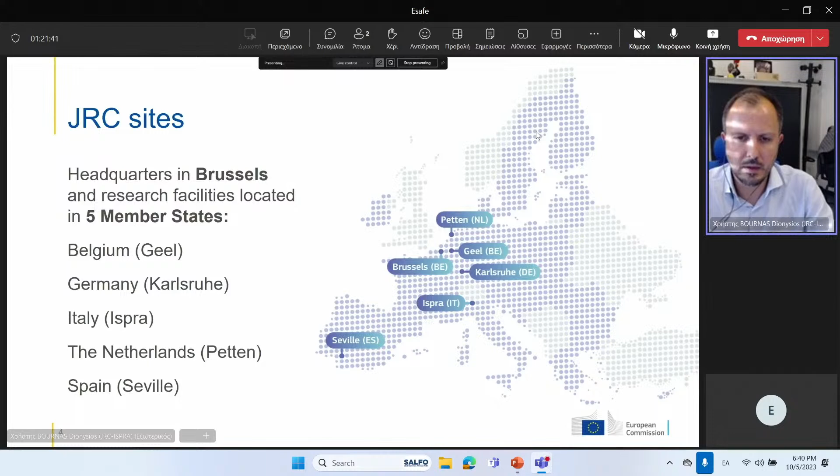First of all, to put you in context, the JRC is the Science for Policy Service of the Commission, and we provide independent evidence-based knowledge for EU policies. We have our headquarters in Brussels, but we are divided into 5 sites, with the biggest being in Ispra, where I'm also based.

Regarding this talk, it includes 4 areas about buildings and EU policies. I will start with those, then experimental assessment activities for existing buildings, then novel technologies for integrated retrofitting, and I will close with the evaluation of the integrated retrofitting.

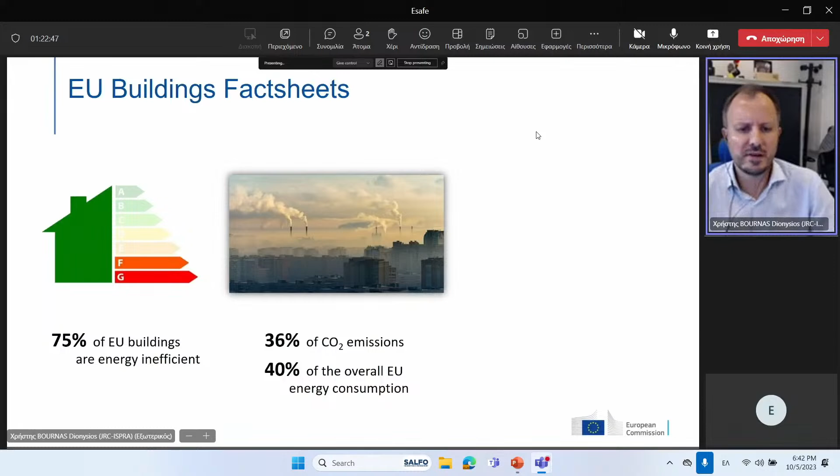The main issue in Europe is that our buildings are old. They are quite energy inefficient - 75% of our buildings are energy inefficient, consuming the big majority of total EU energy, 40%, and generating 36% of CO2 emissions. On top of that, 1/3 of Europeans are exposed to earthquakes. So when we speak about renovations, we should take into consideration seismic together with energy.

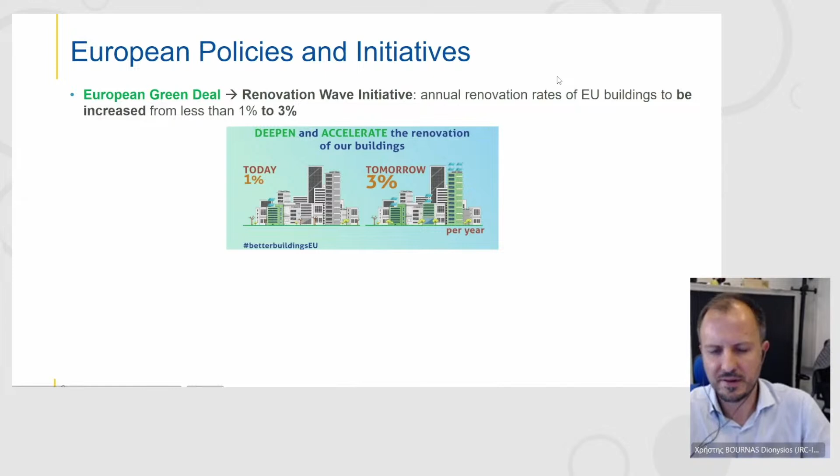Now in terms of EU policies and initiatives, we have the Renovation Wave initiative. Today we renovate around 1% of our buildings - that was the figure in 2020, but we need to do more, to reach 3% if possible. That was even highlighted last year with the energy crisis and the need to reduce dependence on Russian gas.

So energy renovation is a key element. However, the Energy Performance of Buildings Directive itself states that countries need to use their long-term renovation strategies to address also seismic risks and fire safety. On top of that, the recovery and resilience plans following the pandemic found many countries proposing integrated renovation schemes.

So in this presentation, I will start with the experimental assessment of existing buildings. We did that by designing and constructing a full-scale prototype building, typical of pre-70s construction - this is a masonry infill RC frame - and that was done at the European Laboratory for Structural Assessment, the ELSA lab in Ispra.

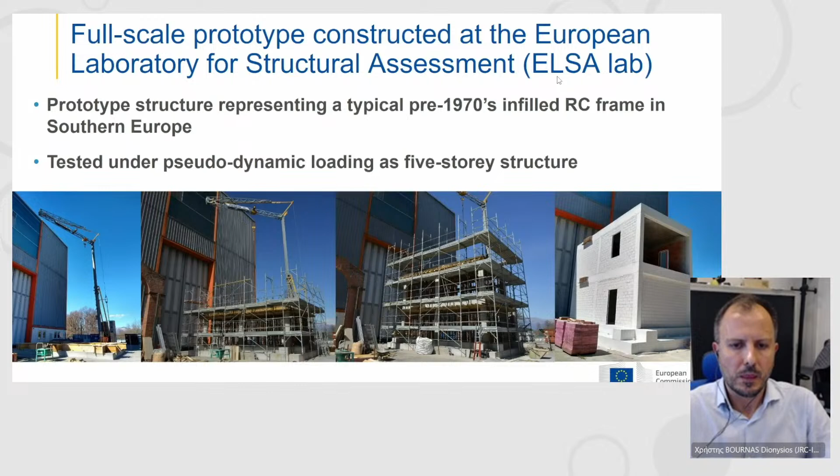Here you can see a video where this building was transported into our laboratory. I don't know, do you see the video already?

No, we can see. Oh yes, it's moving, so it's a video. There is a delay.

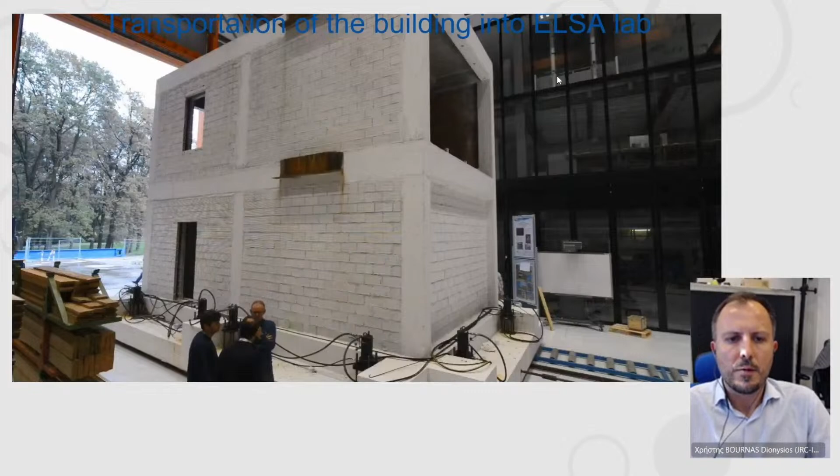This is to give you an idea of the scale. This is the full-scale prototype, and we did seismic assessment tests, but also tests to evaluate the energy efficiency of this building.

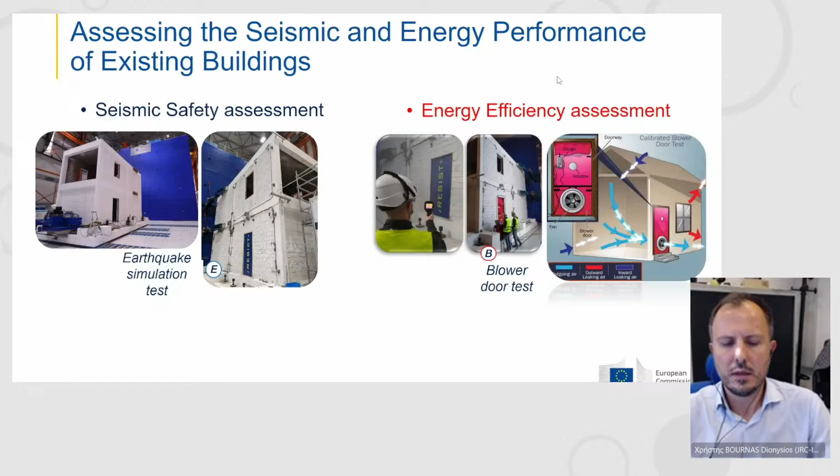In a series of tests, we initially evaluated the energy efficiency by means of blower door tests, and then we conducted earthquakes. We saw that even a slight damage, as you can see here, could reduce the energy efficiency significantly—even damage we wouldn't consider for strengthening, because it's only minor.

And then we continued until bigger earthquakes. I will go directly to the next slide, which shows the last test at a peak ground acceleration of 0.30 G. This corresponds to a design level earthquake, both in Italy and Greece, I would say.

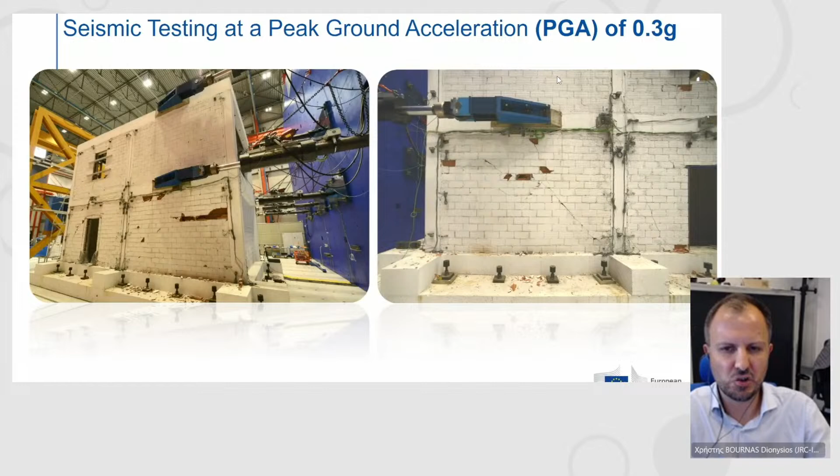In these two videos, you can see that the masonry infill is completely destroyed. Those damages that were noticed are not repairable.

So the outcome is that under such earthquake, we have damage that is not easy to fix because of the high costs. But even in small earthquakes, we saw that the thermal performance of the building is reduced.

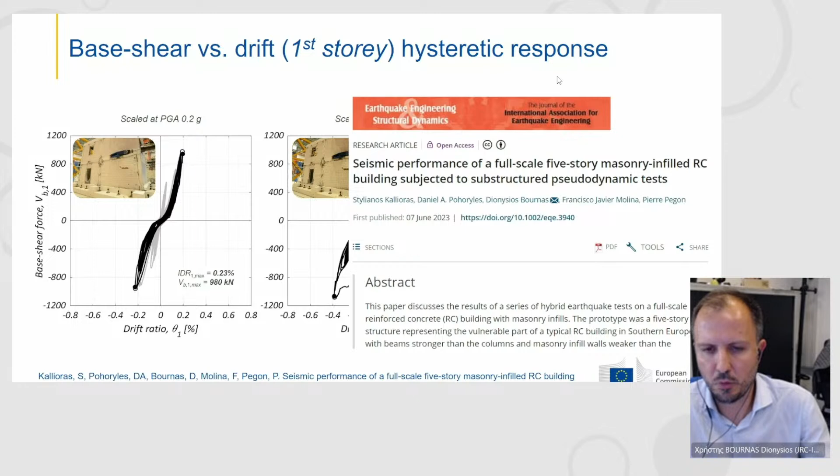You can find more details about this study in this recent publication, which is open access, and we could provide it to you. The next step now, since we saw the vulnerability, is to apply novel technologies for integrated retrofitting.

In this slide there is a categorization of integrated renovation technologies. I would say someone could do integrated exoskeleton solutions, but this is a quite expensive solution. Interventions on the envelope of the building appear to be cost effective, or interventions on horizontal elements.

We focus our work on these types of interventions. Following an analysis we did, we saw that both in terms of costs and effectiveness, these two methods could be very effective. This state-of-the-art review provides more information on the analysis of technologies someone can use for integrated retrofitting.

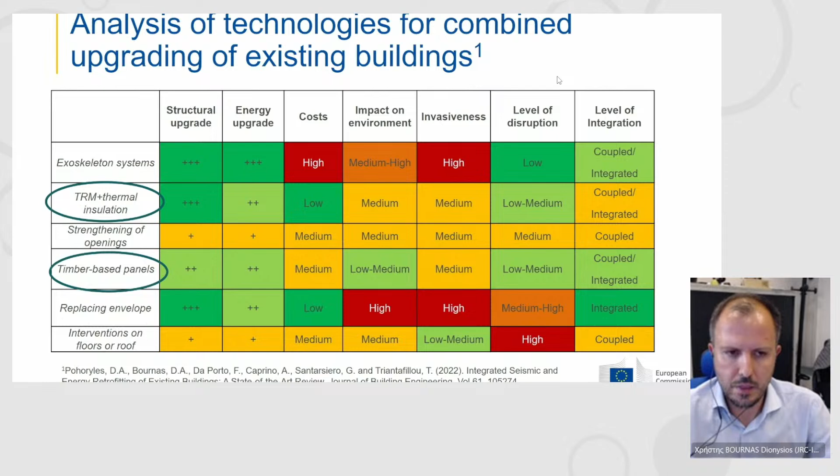The first step was to use timber, bio-based materials. This is a project NOTICE EUB. This is a Marie Curie fellowship we hosted at the JRC.

Now we went to the previous building. We demolished the damaged infills. Are you on the same slide with me? Yes. Okay.

So we replaced the damaged infills and we installed cross-laminated timber panels with two different configurations. In the first floor, we installed timber beams which were fixed to the beams, and then on the beams we fixed the CLT panels. At the end, thermal insulation inside.

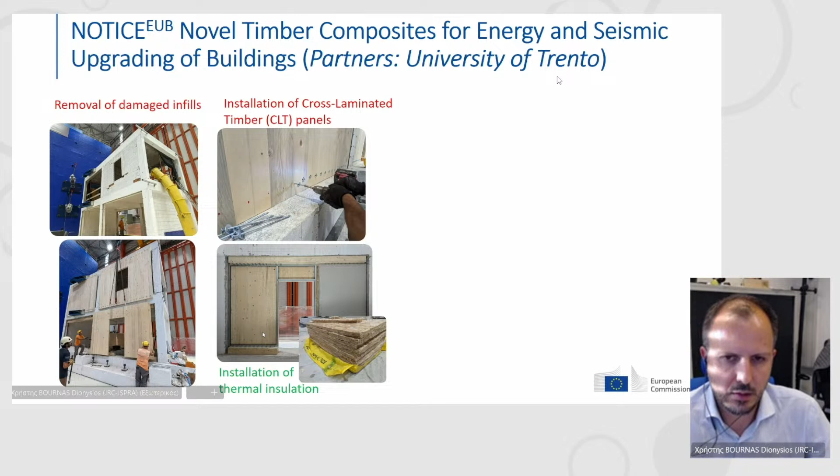In the second floor, the CLT panels were installed directly to the concrete beams, as you can see here. This would allow the strengthening scheme to be installed without removing the infills in case of existing structures.

The next video takes some time. Here we have the video where the same specimen was tested in a much larger earthquake, 0.45 G. I hope now you can see this video.

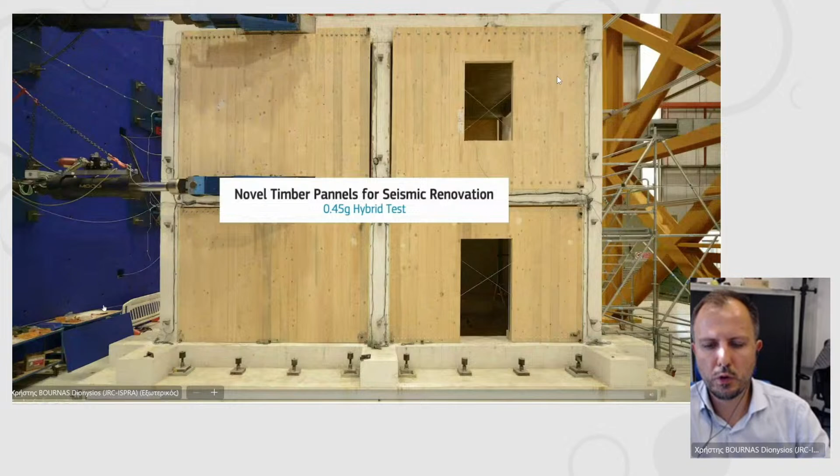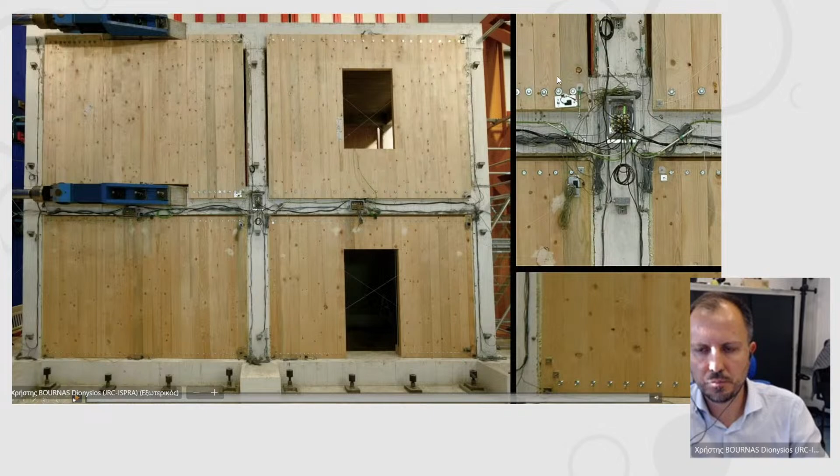Then there is another video in which you can see the connections at the beam column joint and the rocking of the panels. Overall, this technology proved to be very effective and damage-free up to a very large earthquake.

Another system we also tested was the use of advanced materials with thermal insulation, also tested by other researchers for masonry structures. We tested this here for reinforced concrete buildings with masonry infills. The idea is to first provide seismic retrofitting by strengthening the masonry and then add thermal insulation.

I will go a bit faster to the slide which shows the retrofitting. So in the same building we rebuilt the infills. We retrofitted the joints that were cracked because of the previous test, and after that we applied this material.

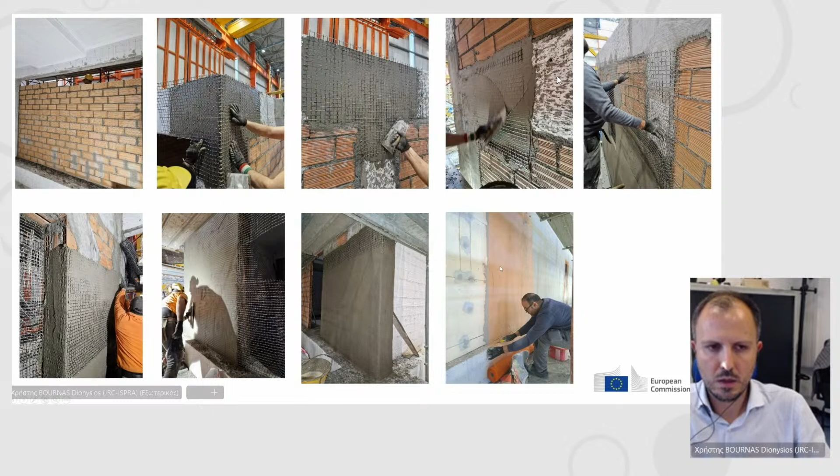This material is called textile reinforced mortar. So we have basalt fibers, jacketing with mortar around the infills, as you can see. At the end, on top of that, we have external thermal insulation. This is the building at the end of the application.

This is the last video of this campaign where we tested two large earthquakes until damage of the building. It survived very large earthquakes without damage, and then we went ahead with cyclic tests until we had failure of the system.

Did this video finish? Okay.

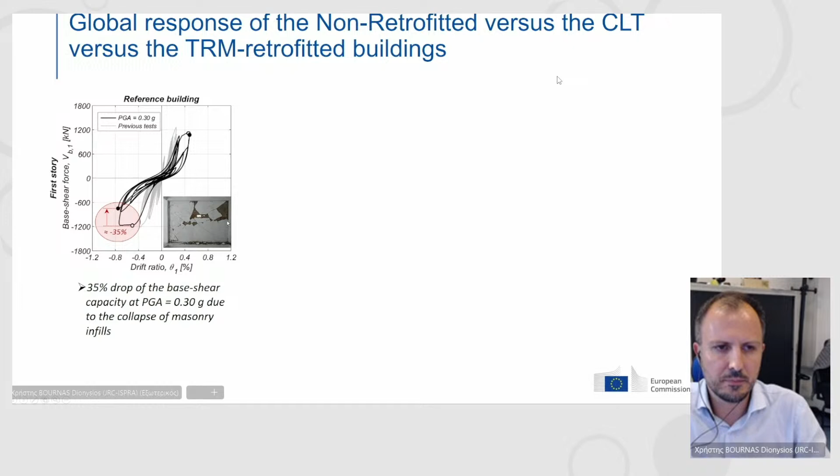Overall, we saw that a non-retrofitted full-scale building at the design level earthquake of 0.30 G leads to big damage and collapse of the infills. The CLT retrofitted survived an earthquake 50% higher without significant damage. The TRM retrofitted with thermal insulation was also quite elastic until PGA 0.35 G, but then had a drop of 15% at the maximum earthquake.

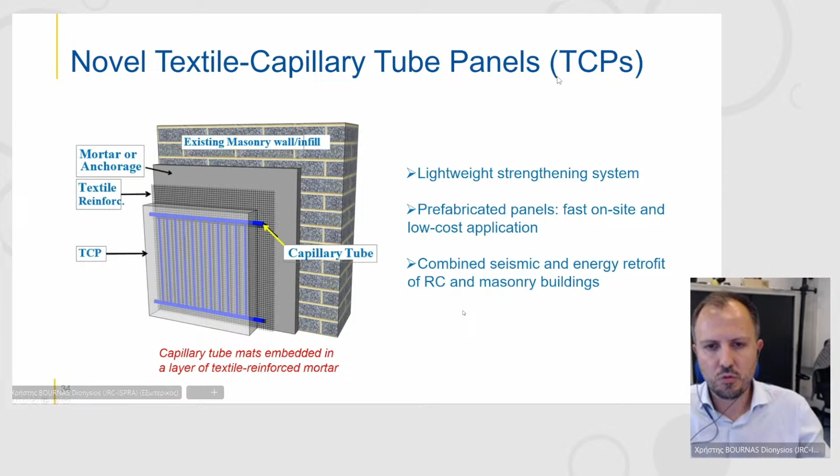You can better see this concept here. This is a lightweight prefabricated concrete panel that can be applied very quickly and very economically on site. In our case, we developed and constructed it in small scale in a lab.

So here we have the reinforcement with the capillary tubes, the mortar, and this is the finishing to connect and ensure the circulation of the fluid.

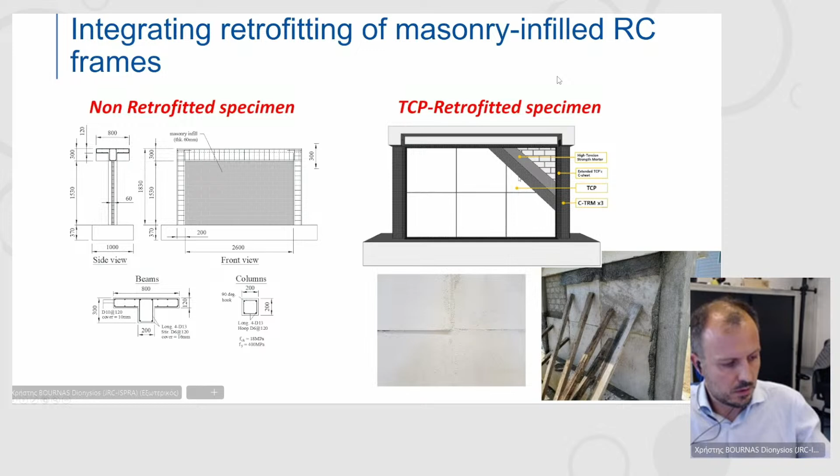This is like floor heating, but applied now to the envelopes, and we tested this system for retrofitting a full-scale frame with infills. We show that it's very effective in increasing the strength, but also it can stay in place at very large drifts without significant damage or high degradation of strength.

At the end, we also did thermal performance evaluation, specifically in a case study of a residential building in Korea, in Busan. Those panels were installed inside or outside the building, and the objective was to keep the temperature of this building at 20 degrees.

That was achieved in the wintertime, and we also studied two different temperatures of the fluid, 25 or 50 degrees, and we saw that even 25 degrees were enough for this system. On top of that, 25 degrees can be achieved using photovoltaic panels, as opposed to 50 degrees Celsius where activation of a boiler was necessary.

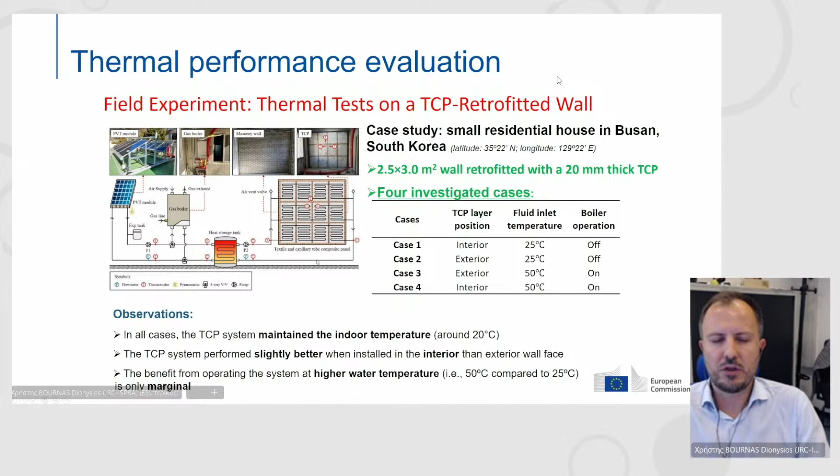So overall, this system was proved to be very effective both for seismic and energy features, and more details can be found in this publication.

Let me go also to two tests we did in collaboration with our Korean colleagues at Pusan National University. Here, that is a scaled building in comparison with the one we did at the JRC. It also has fewer openings, but we show here that this is the unretrofitted building.

We have in-plane damage, and after that, out-of-plane collapse, because this is a real earthquake with two directions of loading. We had collapse of the infills on the second floor.

Whereas the TCP retrofitted specimen survived a very large earthquake which corresponds to 200% of the design basis earthquake. Here we exceeded the capacity of the shaking table, so we stopped, and had only some damages, as you can see here, which were repairable.

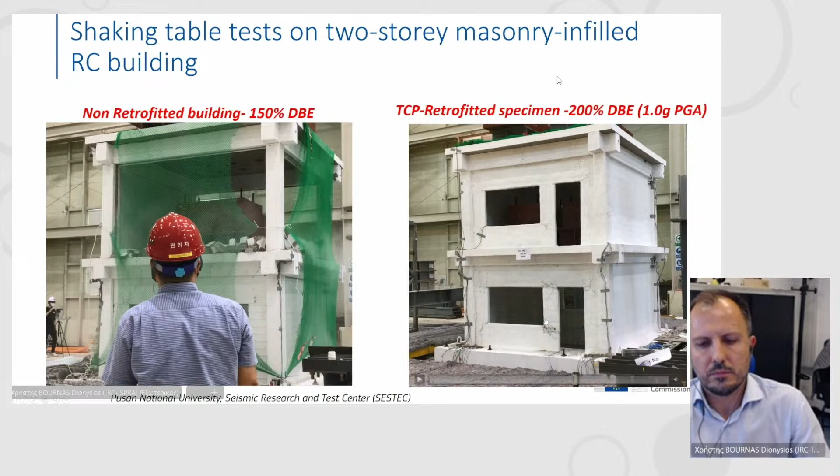So these systems were very effective, and we conducted this very quickly. I will go now to the impact evaluation of these systems.

We considered the European building stock in terms of building age, material, and height. We considered different locations, and conducted building energy modeling, around 1,000 analyses on different building typologies, plus seismic fragility analysis, and all of these were translated into costs at the end.

What is the expected annual loss for non-retrofitted and retrofitted buildings, and what could be the benefits of retrofitting? So we could assess whether the investment is cost effective.

For doing this analysis, we selected 20 European cities with different climatic conditions and seismic hazard levels. As you can see in this map, I'm not going to go into detail, but just to note that we have diversity of those conditions.

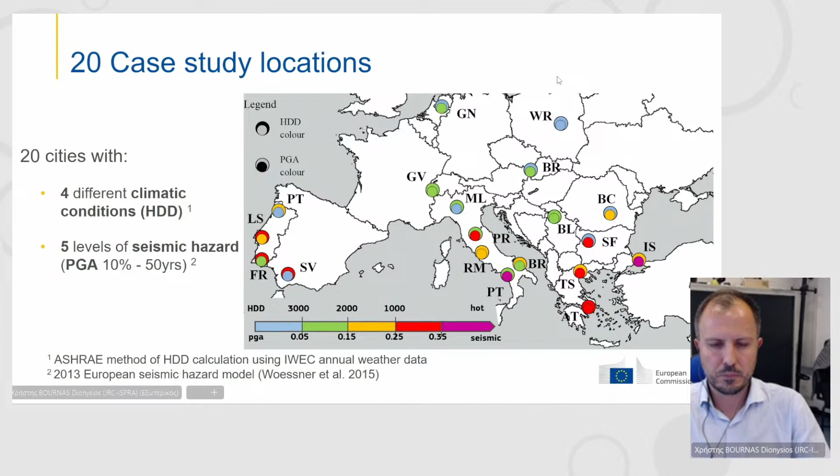What is important to know is that both seismic and energy standards were absent before the 60s. So before the 60s, in most European countries, there is no seismic design, and the thermal resistance is very low. So we prioritized our renovation scenarios for those buildings, and of course for those from the 60s to the 70s.

Two messages from this work: if we increase renovation rates from 1% to 3%, we can have up to 32% reduction in energy use and 38% less CO2 emissions by 2030 already. Note that these numbers relate to the energy and emissions from buildings only. But most importantly, for seismic regions, we can significantly reduce the payback period of the retrofitting investment, especially for high seismicity areas.

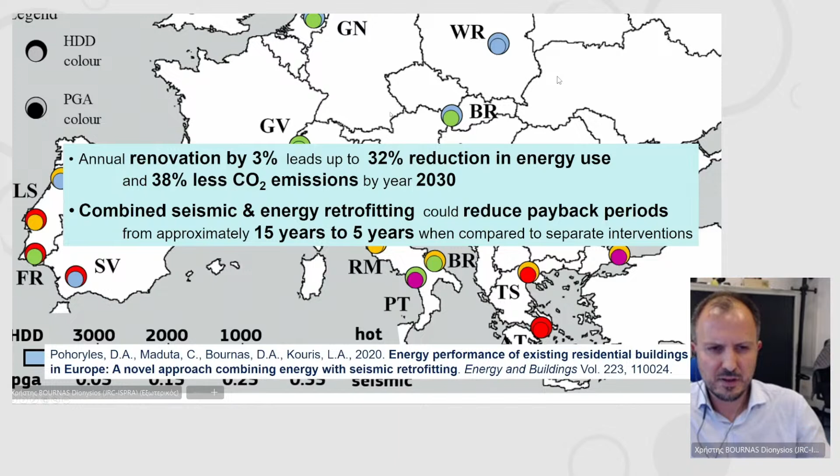More information can be found in this paper. So to close, seismic and energy retrofitting is required in seismic areas of the world, and this affects a large part of our building stock.

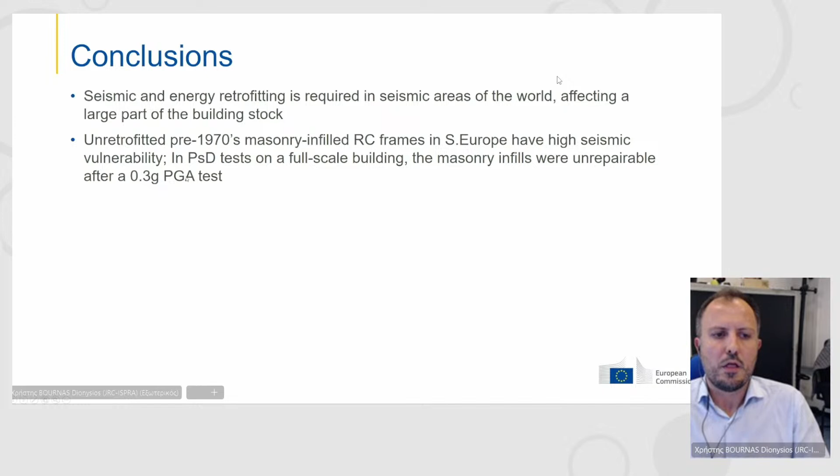Specifically for pre-70s masonry infill concrete structures, there is a problem with the infills, and this was proved to be catastrophic — the damage was unrepairable at 0.30 G. The novel cross-laminated timber panels investigated were found to be very effective until we stopped testing at 0.45 G, and the system remained practically undamaged. Both the TRM jacket plus thermal insulation and the prefabricated panels with capillary tubes could enhance both seismic and energy retrofitting at very high standards.

We saw that in Europe there will be a huge improvement in energy savings and reduction of CO2 emissions if we increase renovation rates, and it's clearly a good idea to implement integrated retrofitting for areas with high seismicity. This could further incentivize renovation rates. Thank you very much for your attention.

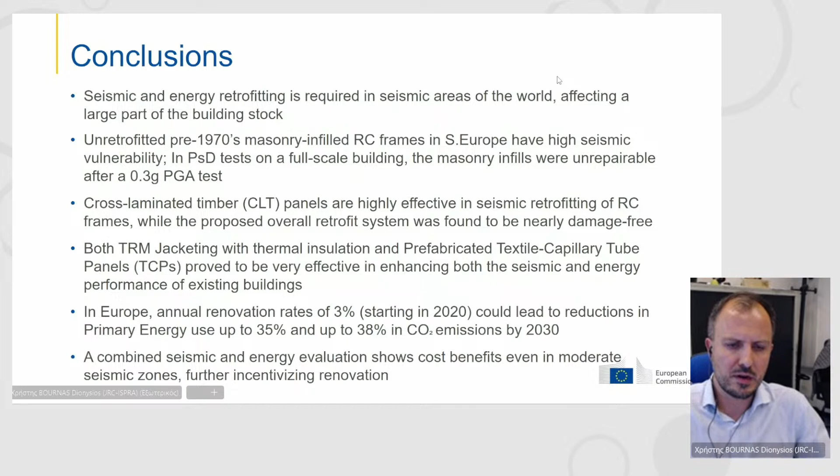In closing, I would like to thank a large number of collaborators we have worked with over the last 5 years on this topic, as this research is part of several projects. Thank you for your attention.

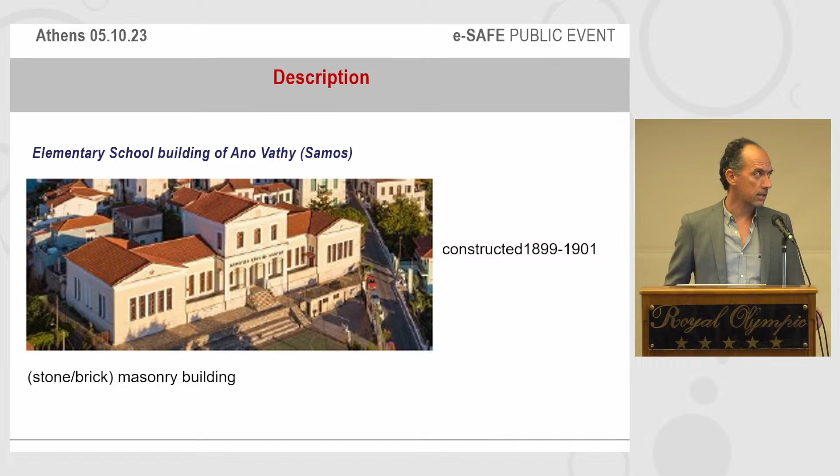And many other things, but let's stay with buildings because this is today's topic. This is the primary school in Ano Vathy. We applied Part 3 of the Eurocode.

We had to document the real resistance of the materials. Many of these buildings were listed and are listed, so we followed this procedure by the Ministry of Culture, which has certain preconditions.

Then there was a construction technique they had in Samos before those intervention regulations — their own technique. Whenever there was a crack or a pathology, they would put these elements, a concrete frame, let's say. This is the floor plan of the building.

In the past, at an irrelevant point in time around 2000, they had these concrete frames — they reinforced the building, not because there was an earthquake. And then some other parts are intact.

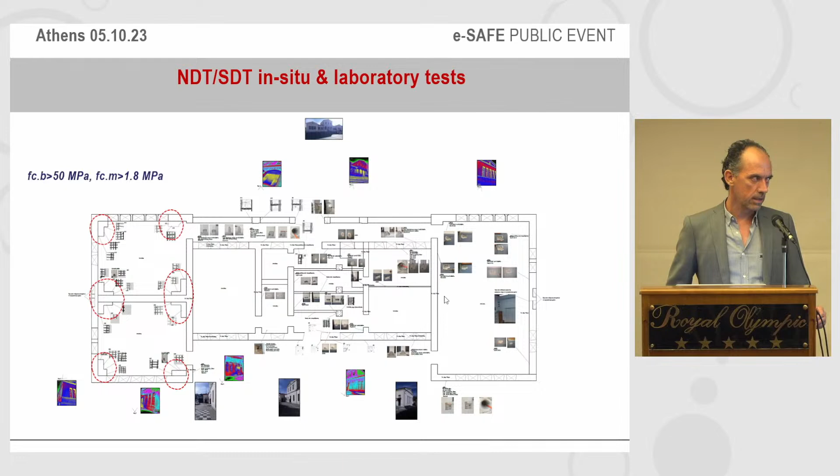On the right, they have another intervention — they wanted to create an amphitheater, and they removed a pillar.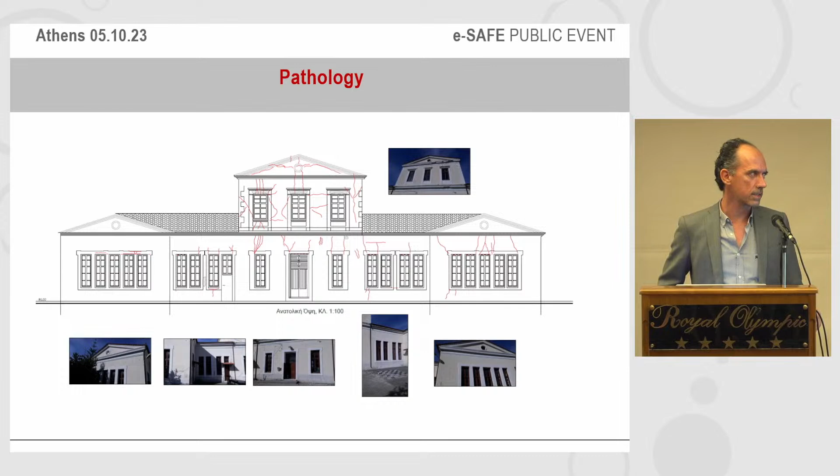Look at the pathology. If you go back, you will see that the left part is the one where we had this strange intervention. It's different from the other part.

We used more advanced technologies, 3D tomography and georadar. Here you can see the interventions that had to be calculated in order to go up to level B1. This was enough because usually in schools and similar buildings, this is the minimum goal. Now, by consent of the owner, we can go lower.

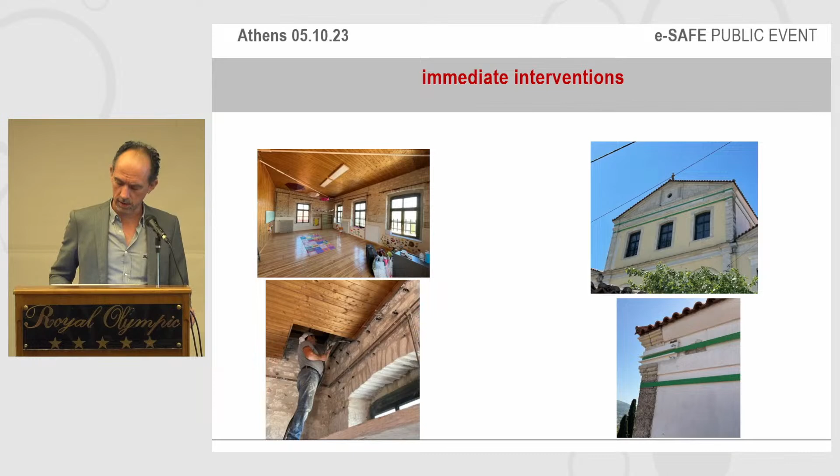We had to use a belt, usually used to lift loads, to wrap it around the building to keep it in place and avoid deformation. Once again, an intervention to avoid deformation.

This is the gym of the high school, first and second high school. All interventions were removed, it was reinforced and renovated. There was an energy renovation, but that was a waste of money — the investment was pointless here.

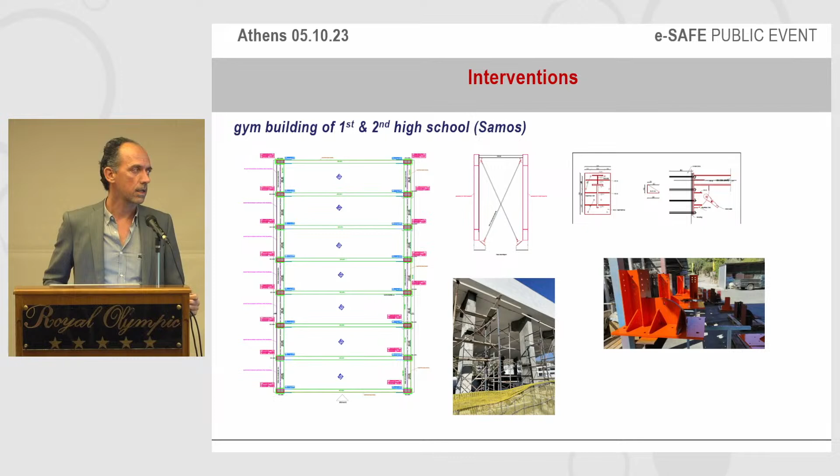Once again, we could not cover B1, this target, the B1 level. We had to use, once again, the same technique.

Now, if we take into consideration all the buildings, what we did was repointing of mortar joints. These were very listed buildings, as I said before. For TRM, we had to use a matrix compatible with the material in the masonry, because in most buildings we didn't have concrete, so the TRM material, the mortar, etc., should not be like that.

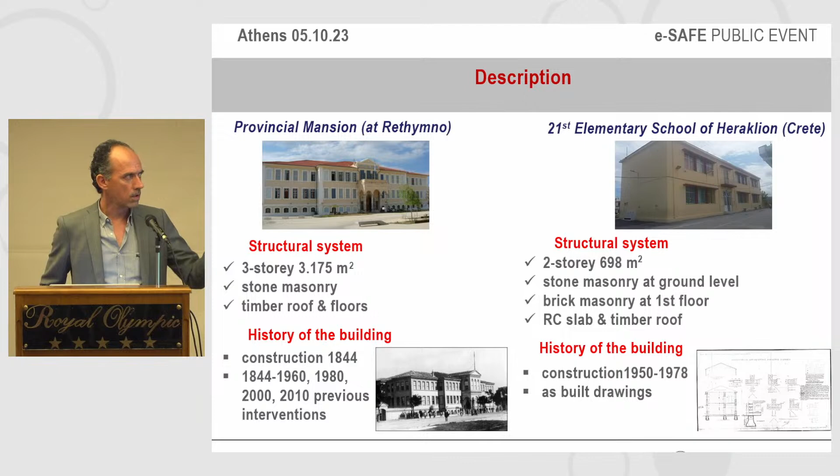Then FRPs, steel beams and compression struts, and of course the masonry that was repaired in the way I described before. Here, another picture from Crete — an administrative building, and then a school in Heraklion.

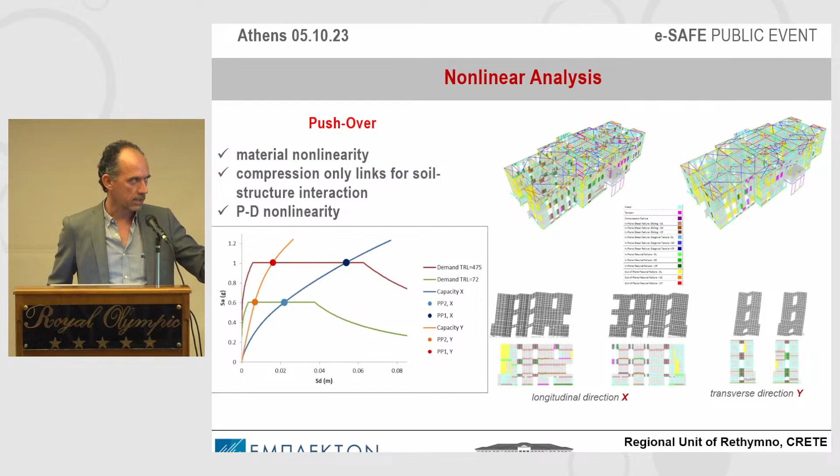Here you can see the methods we use for concrete buildings: FRP wrapping, joint strengthening, infill isolation, addition of steel frames and bracing systems, when we have to create resistance and rigidity.

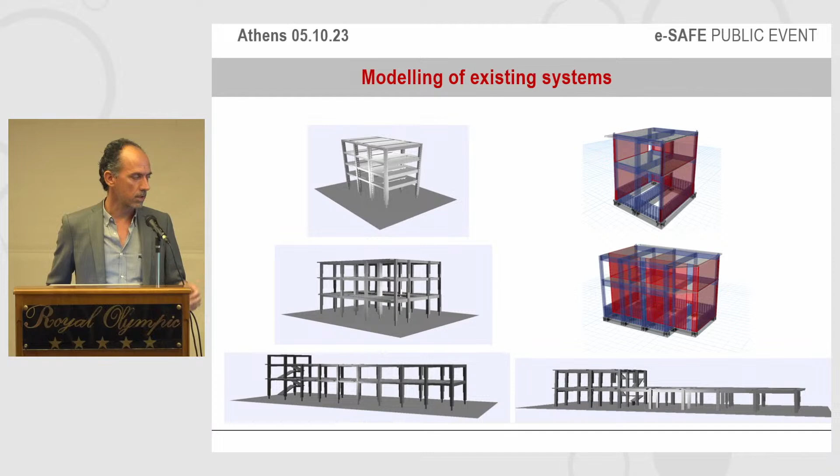Once again, concrete buildings in Heraklion. The university had these buildings. Once again, performance-based intervention. We had to do mass reduction in order to achieve the target. We had to remove a slab and use timber instead. Then we had staircase isolation.

And I think I used my time as I should. So thank you very much.

We would like to thank you too. Now, Mr. Mandopoulos... Mr. Ladopoulos, from Hellas CO. We cannot hear the lady when she speaks, she's off the mic.

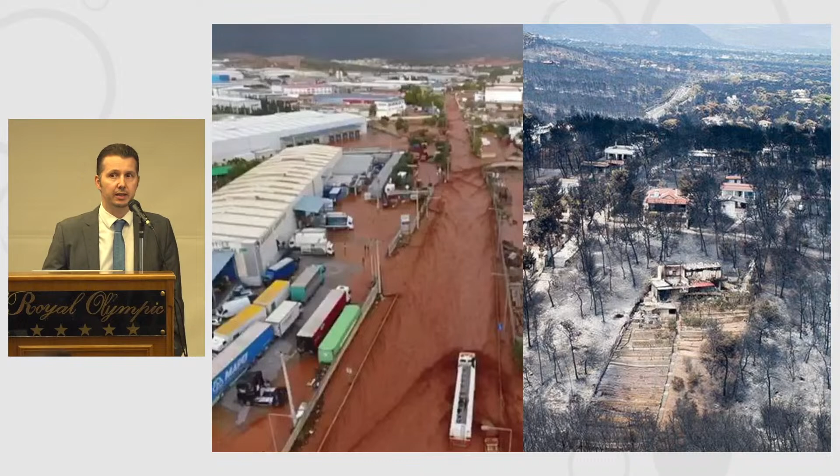I think that even the best manager, and we have quite a lot of these today, it would have been impossible to find all the threats with the best SWOT analysis in order to know how to solve things. Nevertheless, we have even greater problems, things we considered impossible, or something that would only happen far from home, in Australia or the States or Saudi Arabia, happened. And they said, well, this is temporary. But we see that they happen more often and more extreme. And they are here to stay.

This is a huge problem. How will we solve it? The solution is to think out of the box. Let us try to do things that must be done. We can't leave it by the wayside. This has to be done.

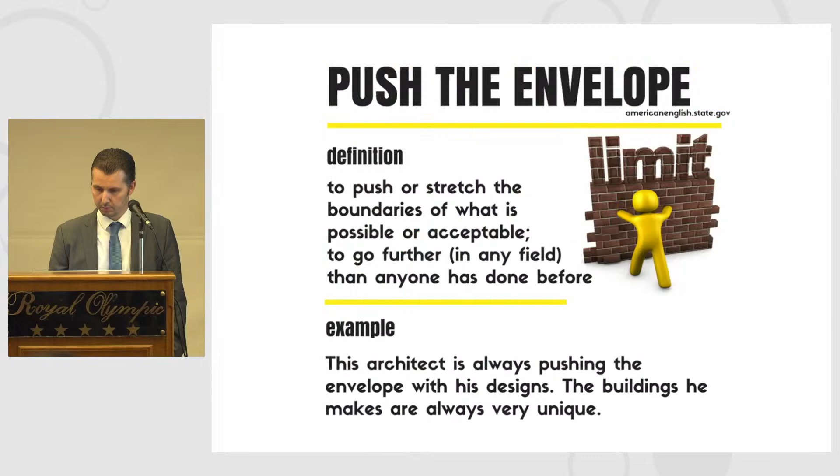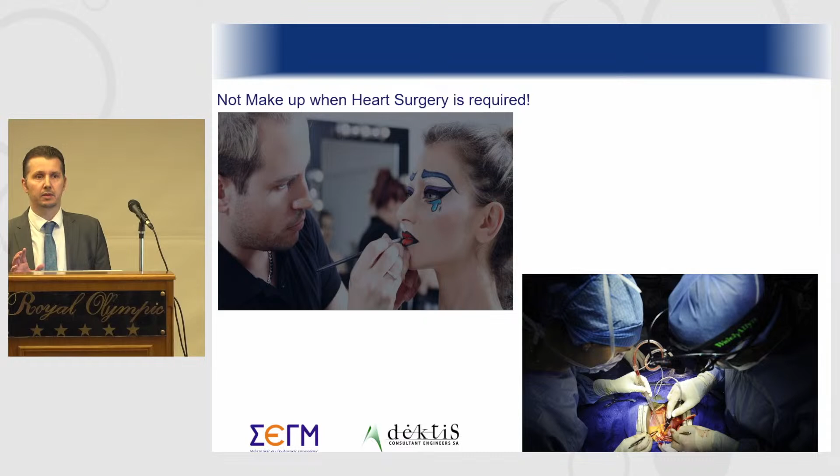So energy upgrading, as it's happening not only in Greece but elsewhere also, it's as if we're applying makeup when open heart surgery is really required.

Until now, energy upgrades in Greece took place without taking into account the passive fire protection of a house and without structurally reinforcing it. And we know that energy upgrades meant actually lighting, insulation, openings, a bit of BMS, a bit of cooling, in the best of cases. These are the programs that have been running in Greece: energy savings programs, the Electra program, an energy upgrading program for public buildings, and net metering, which will become net billing, and e-mobility.

In red, you see what the association has proposed. It's an energy savings plus with respect to major companies that have a large building stock, so the footprint of their energy upgrading would be much larger. And these are the various letters that we've sent.

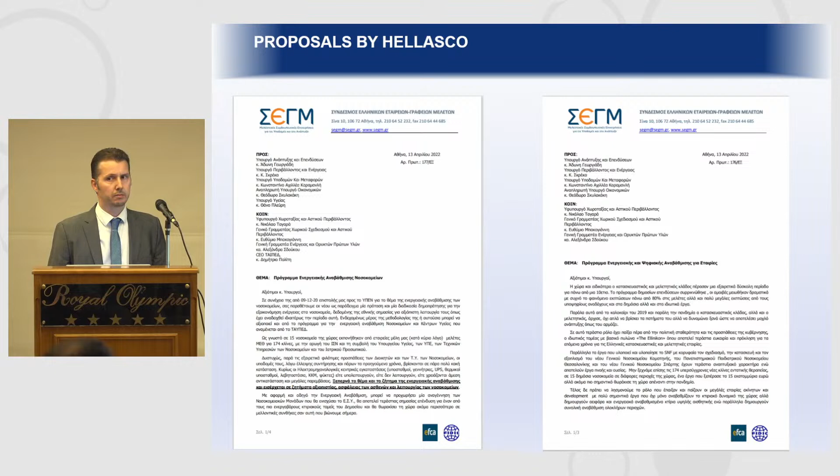But why am I talking about this? Because I would like to note that in TAIPED, the privatization fund, when there were various movements made in this direction, took these points into account and looked at the structural adequacy. So this was a step in the right direction. Let's talk about the good side of these things also.

Now, what must be done? We have to act holistically. We must not act independently, in order to avoid what Mr. Bardakis referred to, whereby we have to go and remove the insulation or other materials that we'd placed before, and money goes down the drain. Now, KENAK, a new KENAK - this is very important because on that basis a lot of projects are going to be constructed, and we have to see whether this has further problems and additional cost.

We want to have real energy upgrades, and not simply procurement tenders with innovative technologies. Let's take into account user needs also, take on board digital transformation, to make certain that the tenders take place fast. Tenders delay - even though there is the intention on behalf of the state or otherwise, they are still delayed. And that means we might well lose funds from the various funds.

And you know, the design offices should not also have to do everything at once: specifications for materials, and design according to budget.

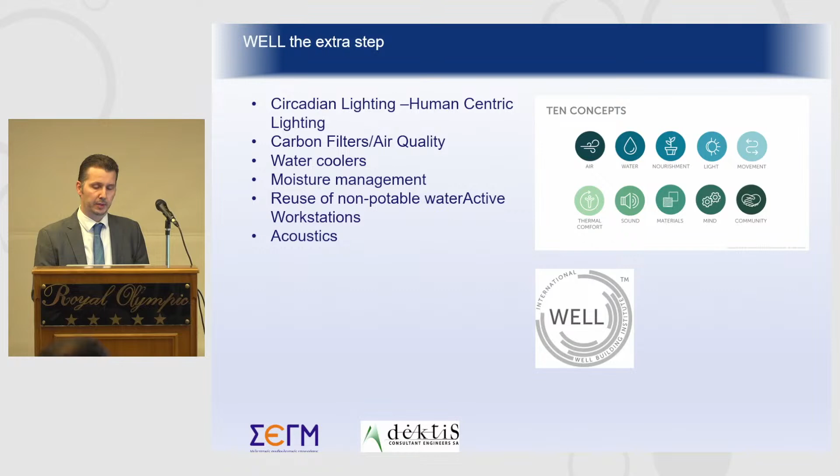These are prerequisites. Now, what's the step further? Based on standards that not only look at sustainability but also keep in mind the well-being of users, we have circadian lighting, human-centric lighting, and we want to have moisture management, and after COVID we need very special filters to have good air quality.

Is NZEB a solution? I would opt for a positive energy building, but that is also a trap, because we see that the energy design takes place, and because through a PV we can achieve the class that we want, we end there and we don't take it further in order to ensure the true energy upgrading of the building.

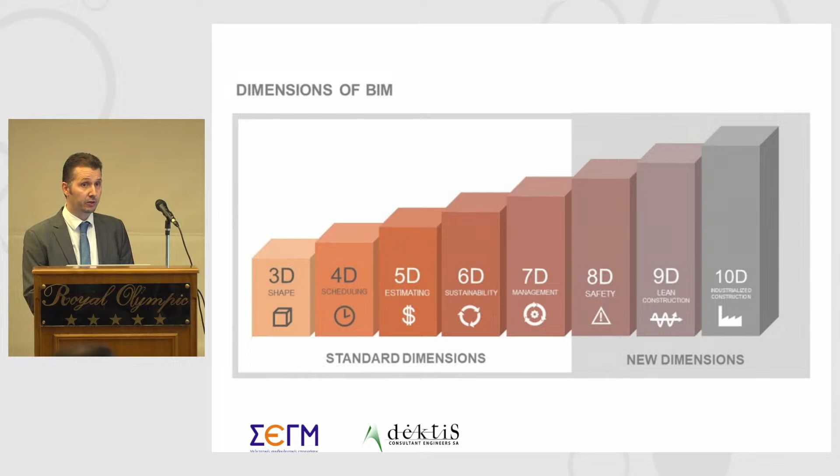I don't know if we are ready yet to work in 8D or 9D, but in certain projects we go up to 6D, even at Ellinikon. We can use this as a tool and not as a 3D design. We have to understand that we can no longer talk about 3 dimensions. This is a tool that takes us further.

But we have to think a bit more. Money is a problem, that's obvious. This is not an easy thing. But we saw the consequences, we saw where we're at. And it's time to act. I think it's high time to do so. Thank you.

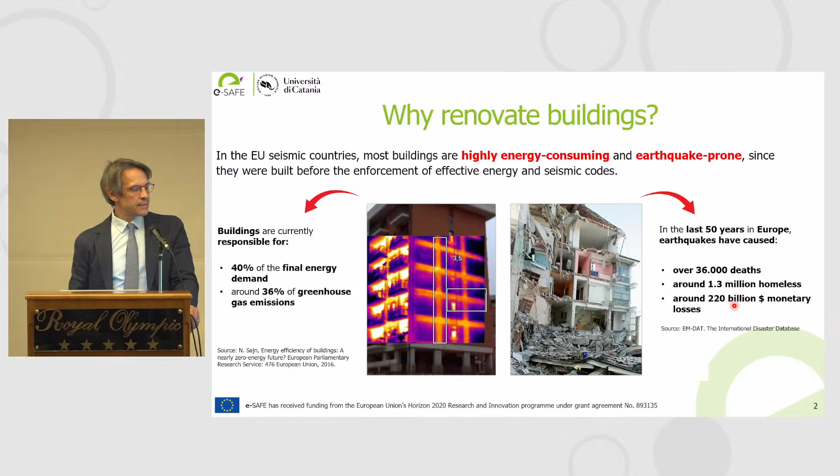I would say this is enough. And these figures do not entail the earthquakes that recently struck countries close to our European borders, namely in Syria and Turkey last February, and Morocco last month, causing both together nearly 60,000 deaths.

So we must consider that investing in disaster preparedness before a natural hazard like an earthquake occurs will considerably reduce the need for humanitarian action. According to estimations of the United Nations Development Programme, every dollar spent in reducing people's vulnerability to disasters like earthquakes will save around $7 in economic loss. This is a ratio of 1 to 7, which is really relevant - and this is without considering human losses, human suffering, and social harm.

So this is why it is essential, in my opinion, to renovate buildings. Actually, in recent years, important steps have been taken to improve energy efficiency, but not as much to improve seismic safety.

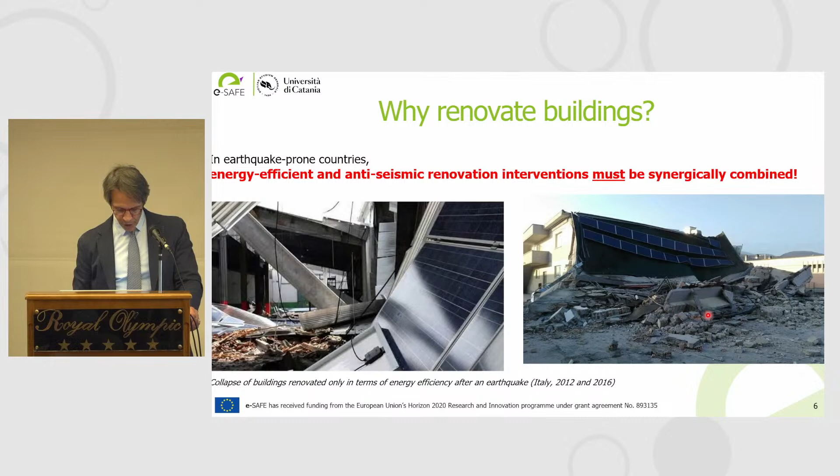And in particular, you can see here two pictures that highlight the collapse of buildings renovated only in terms of energy efficiency. On the left, one after the earthquake that struck northern Italy in 2012, and on the right, one that collapsed in 2016. This means that in earthquake-prone countries like Greece and Italy, energy efficient and anti-seismic renovation interventions must be synergically combined.

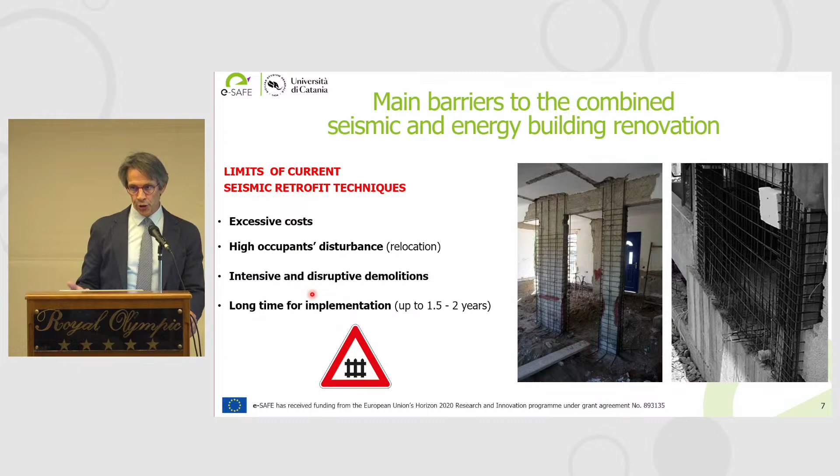The problem is that current seismic retrofit techniques available on the market have relevant limits that considerably reduce widespread diffusion. In particular, I have highlighted these main limits: very high costs, high occupants disturbance, relocation of furniture and occupants, intensive and disruptive demolitions, and long time for implementation for big apartment blocks, up to 2 years. So to overcome such limits, such barriers, we have the eSafe project.

Our project is currently developing specific solutions. In particular, the main technical goal of the eSafe project is to develop solutions which are cost-effective, low-invasive, and environmentally friendly. Such solutions are specifically devoted for the seismic, energy, and architectural renovation of non-historic buildings which have a reinforced concrete structure. So these solutions are not devoted for traditional masonry buildings.

To this purpose, we have built a complementary multidisciplinary consortium made of 12 partners from different European countries, some of them highly earthquake-prone, like Cyprus, Turkey, Greece, and Italy. The project will last until the end of next year, more or less.

So you can see here, in a nutshell, the main technological eSafe solution to combine energy efficiency and seismic safety. It's a sort of new seismic resistant and energy efficient building scheme. So our goal is to operate mostly from the outside of the building. We have two solutions, one on the left and one on the right.

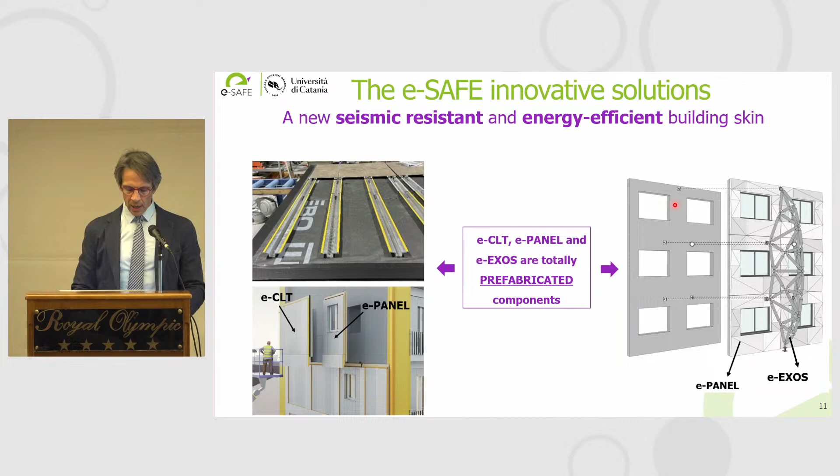All these components, ECLT panel and EXOS, are totally prefabricated. This means that we can speed up the implementation time, be faster, and also reduce somehow the cost and the occupants' disturbance.

Both building skin solutions offer the following relevant advantages: reduce occupants' disturbance, as I said before, reduce implementation time and cost, use of bio-based materials, mostly wood, and then increase aesthetic and functional attractiveness.

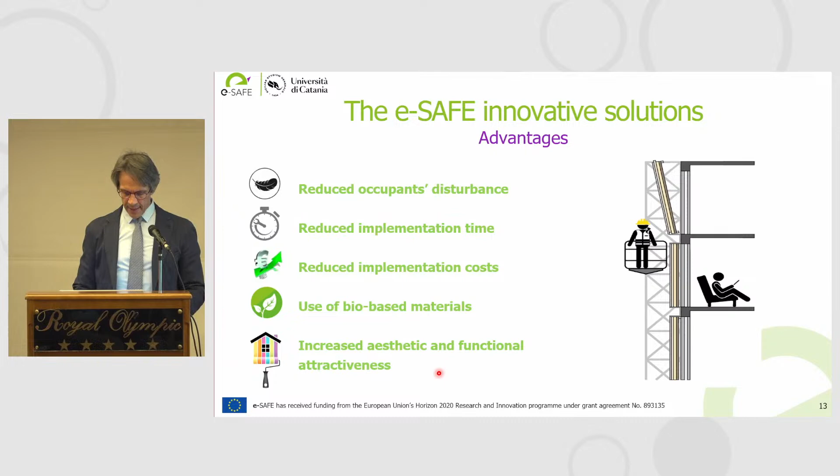eSafe also integrates a new innovative technical system called eTherm that includes high-performance air-to-water heat pumps, insulated water tanks to store the thermal energy produced by the heat pumps, and then PV modules with increased self-consumption rate that will feed also the heat pumps, and fan coils fed at low-medium temperature. We are also developing specific slim tanks for the storage of domestic hot water.

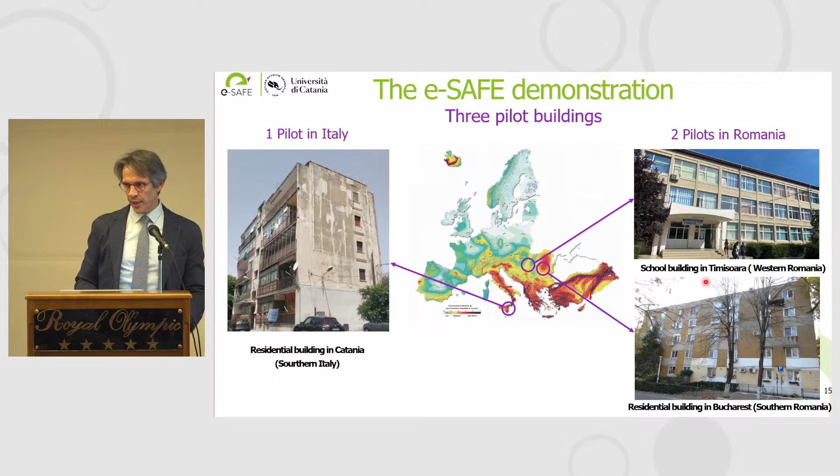So now some possible applications of the eSafe technical concept that can be expressed in many different and customizable ways. We have 3 pilot buildings: one in Italy, the residential building in southern Italy on the left, and then 2 pilots in Romania. So we have different climate zones to demonstrate our solution, always in seismic-prone countries.

This is the second pilot building. It's a school building. In this case, we are going to demonstrate the eExos, the external exoskeleton solution. You see on the left the current state of the school, and on the right the render of the design state, already produced with the help of the students and teachers of the school with a co-design approach.

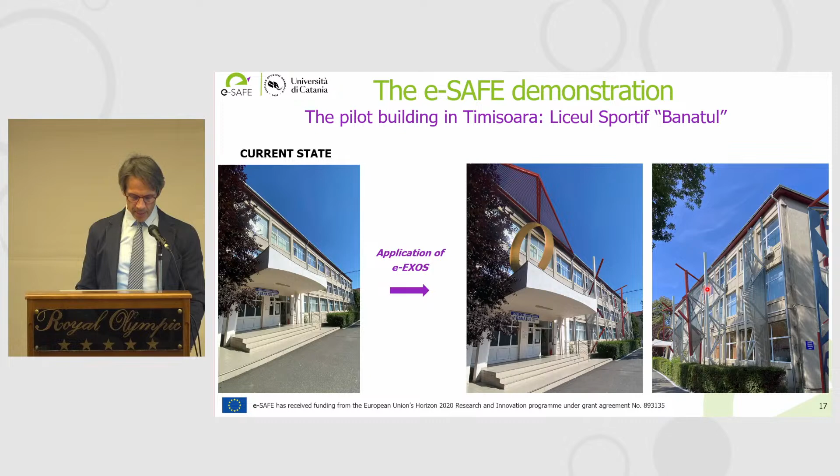So in conclusion, the big hope and also the big challenge of the eSafe project is to effectively contribute to find proper solutions to make our buildings, and also our cities, more energy efficient, safer, and more sustainable. To do this, we need your commitment and your trust, so I hope you will give us the chance to support you with the eSafe solutions. Thank you very much.

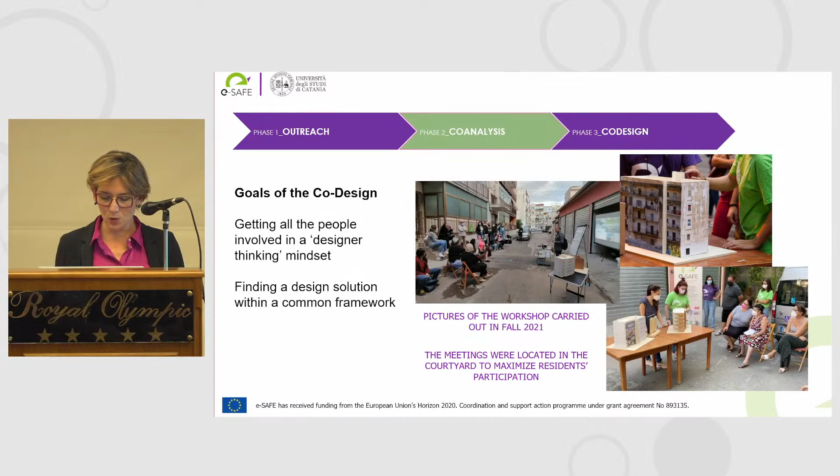In the workshop, we faced all the aspects of a project: structure, thermal plans, aesthetic issues. All the detailed activities are described in a public document, the report of engagement co-learning activity, which you can find by Googling our eSafe community on Zenodo.

But here I'd like to point out the use of some tools that help people with no experience in the field of retrofitting and building construction to communicate with each other. This is the case of the photo voice exercise.

What is photo voice? At the end of a workshop meeting, we ask each resident to share via WhatsApp or email a picture of their dream building. What is a dream building? An image representing a building similar to theirs, but with a much nicer appearance.

This technique used photography as a communicative means in the hands of residents who were not necessarily trained to think and talk about building aesthetics, which might be difficult through traditional communication channels such as speaking or writing. This is especially true in a context like Catania, with a generally low level of education.

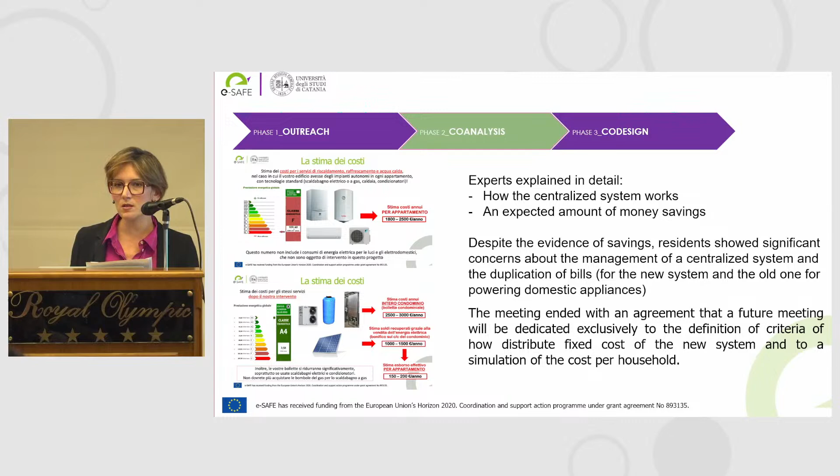The meeting ended with an agreement that a future meeting will be dedicated exclusively to the calculation of the exact quota based on equitable distribution criteria, and to the detailed simulation of the cost per household. This is, as Giuseppe showed, the final project as an outcome from the co-design.

We also conducted a co-design process for a public school in Timisoara, and also in this case we organized a first moment of outreach and stakeholder mapping, and then the co-analysis was carried out through a focus group with students, teachers, the principal of the school, and other public authorities in the field of education, to raise the main aspects to work on the project. And then we carried out workshop meetings where we worked together with craft activities to give an identity to the exoskeleton elements and take into account design elements for visual and thermal indoor quality.

And I don't want to bore you any longer. For further information on this process, you can visit our website or contact us, and we would be very happy to share with you all the things that we have done.

To get to the conclusion, a co-design process pushes us to conceptualize the building not just as a material entity to be modified, but as a complex system where the material dimension relates to the human one.

When we started the process in Catania, the atmosphere was hostile due to pre-existing conflict between both the public institution and the residents, as well as among residents. The simple experience of meeting periodically with a facilitator pushing for mutual respect, listening and understanding, helped in dealing with controversial issues and reaching out to collective decisions.

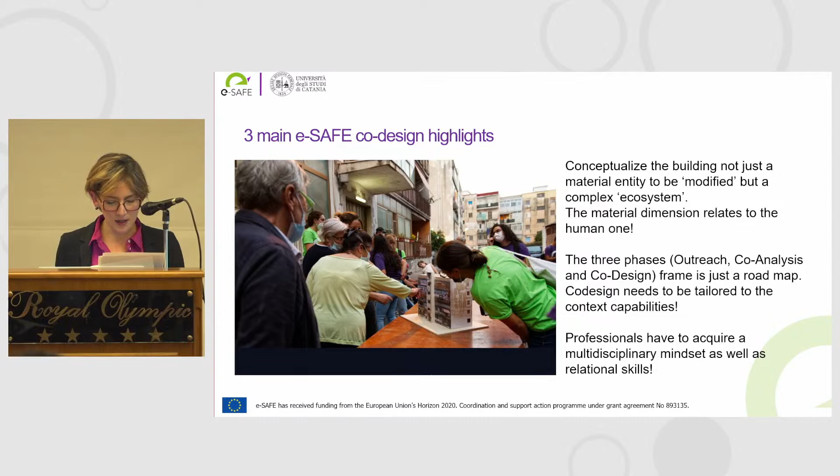This implies that the role of the professional who facilitates the process is central. He or she is the person who balances time and effort, but overall has a clear idea of the goals that can be reached. That's all. Thank you.

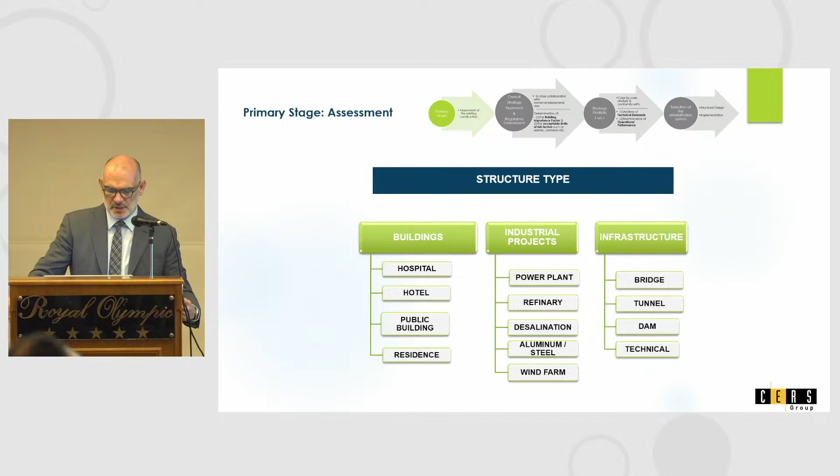In the first stage, we identify the type of the structure. It could be buildings such as hospitals, hotels, industrial projects, and infrastructure. The assessment must originally begin as qualitative and then quantitative. When we have the quantitative assessment, we can either use measurement-based assessment or model-based assessment.

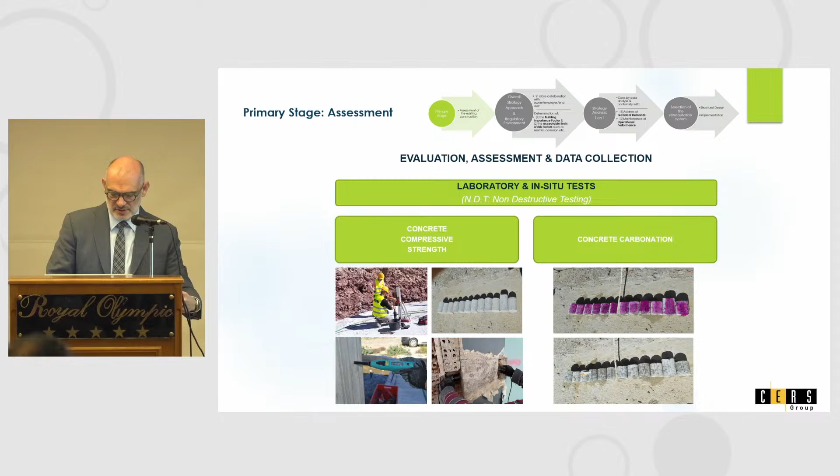The evaluation process involves a number of laboratory and in situ tests. This can be concrete compressive strength test, concrete carbonation, reinforcement detection, chloride content, half cell potential, linear polarization resistance, ultrasonic tests, and X-ray to reach something in larger depth.

We also must implement tests such as steel hardness testing, steel tensile test, and pull-off test to identify the concrete tensile strength.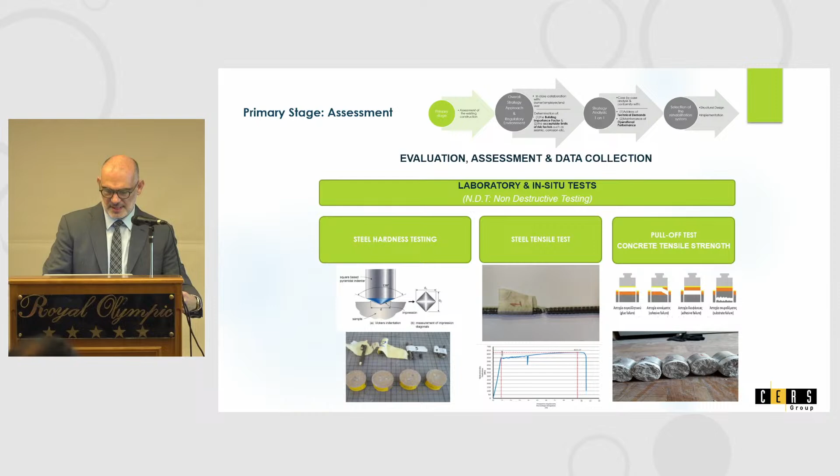There are a number of regulations that can be followed in order to implement the rehabilitation. There are a number of international regulations, such as FEMA 577, where in this table below we see the comparative cross-reference of various seismic performance ratings.

In this table we see how different buildings are benchmarked according to seismic design provisions. And of course, there are cases where special conditions, such as hospitals in this case, the buildings are rated for a combination of structural and non-structural performance indications.

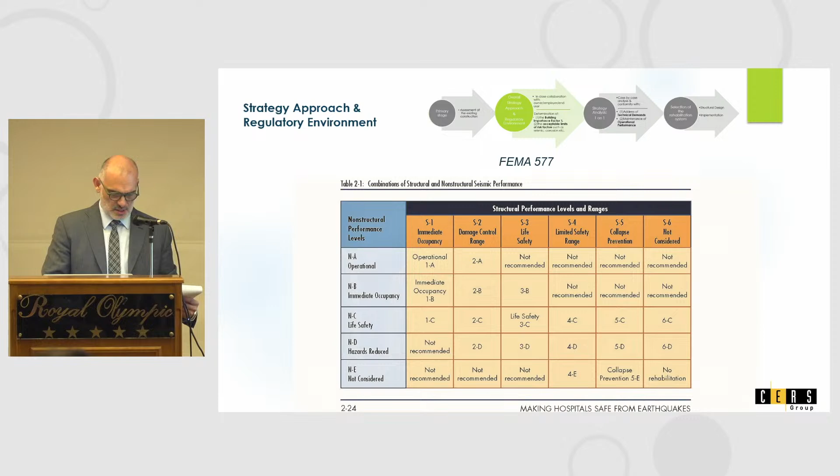In Greece, the most relevant regulation is CANEPE. It is the regulation for structural intervention. In this table, the anticipated performance of the building is identified.

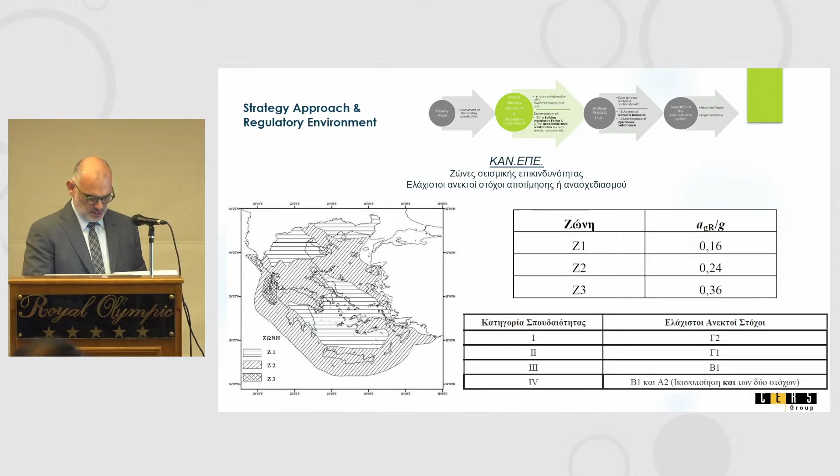CANEPE also introduces that there are different zones of seismic activity across Greece, and there are buildings which are categorized differently with reference to their importance. There are 4 different categories, as we probably all know, and they mostly are categorized in terms of their own importance.

In the third phase, in the third stage, what we must do is identify the technical demands and the technical restrictions of the structure. For instance, we might see that there is a need to increase the elements' bearer strength, to increase the deformation capacity, the absorption capacity, and perhaps the seismic isolation of the building.

However, there are always restrictions that must be considered. Restrictions in terms of functionality, of the way that the rehabilitation interventions will be implemented, the correction of defects, the rehabilitation process that perhaps must take place either in use or not of the building, the progressive implementation of the rehabilitation,

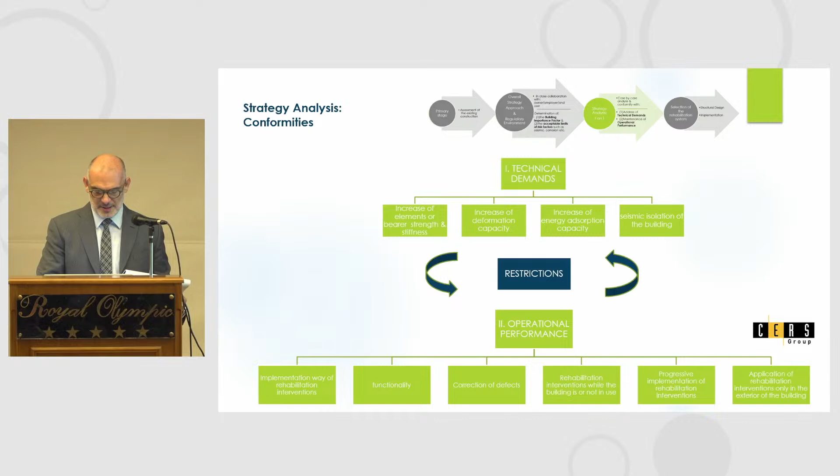and the application, as a possibility, the application of the rehabilitation interventions only in the exterior of the building. In general, the restrictions can be summed up as restrictions in time, cost, and the impact they have on the functionality and the use of the building.

During the design phase, we must also keep in mind that apart from the CANEPE, the design must also follow the principles of the relevant EN code, both for damaged concrete and for corroded reinforcement.

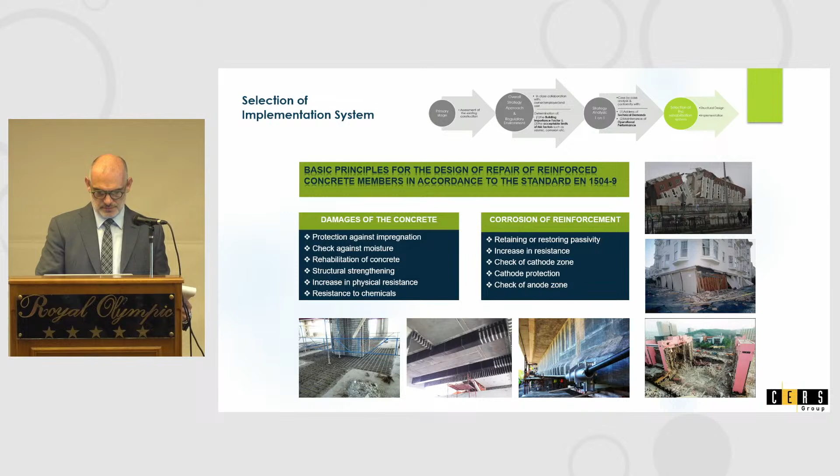A short description of the classic methodologies in terms of rehabilitation procedures are indicated below. It is the increase of cross-sections using shotcrete or cast in situ reinforced concrete, the use of steel jacketing, the addition of new steel elements, the addition of laminated steel strips, and the use of injection resins.

More innovative methodologies of rehabilitation involve the application of FRPs, involve the epoxy mortars to use with steel strips, the use of specific steel bracings inside the buildings and outside of them, and even more innovative methodologies such as the external post-tensioning system or the application of seismic isolation systems.

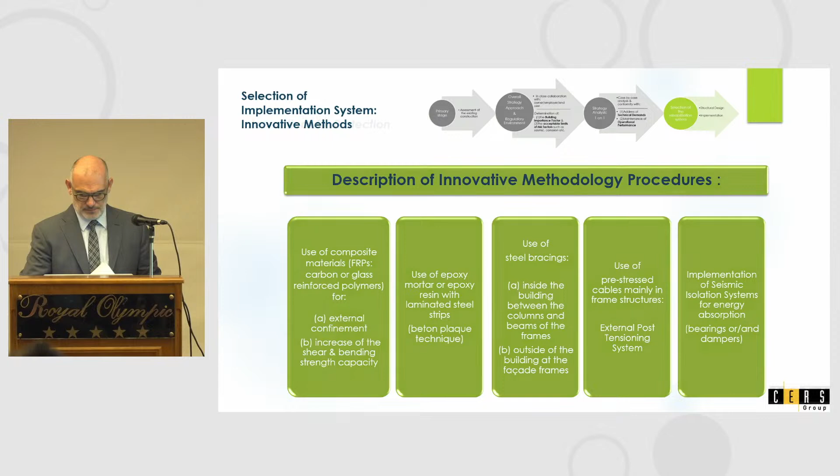And we always must keep into consideration the fact that the durability issues have to be addressed as well. Corrosion inhibitors must be applied, zinc anodes for galvanic protection, where the case demands, or aluminum anodes, and even protection system for the concrete surfaces.

There are advantages and disadvantages on the methodologies that are more common in the Greek market. The most common approach in the Greek market for rehabilitation process is the shotcrete approach.

This approach offers certain advantages such as the small thickness of application, the high compression strength, the very good adhesion, and it is fire resistant.

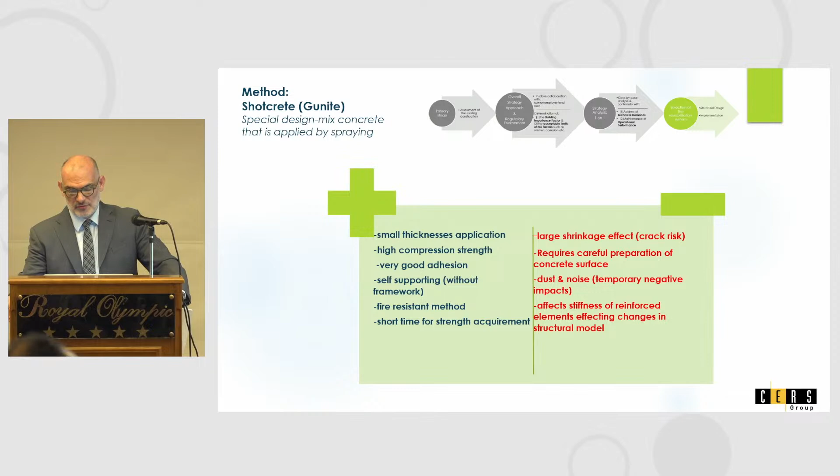Quickly, we may say that it requires careful preparation, and it involves a lot of dust and a lot of noise. Here are some pictures of implementation of the shotcrete methodology.

The injections, the epoxy resin injections. This can assist in sealing of active or non-active cracks with different widths. And of course, this can be implemented even in the presence of moisture. However, this methodology is not applicable when the damages are serious, and it needs some fire-resistant cover.

These are different pictures of application of resins in different structures, concrete structures.

Cast in situ concrete. This requires less preparation of concrete surfaces. This has a lower cost of application, a lower need of expertise, and it is fire resistant.

However, it requires framework, it requires formwork, and it requires a lot of space to be implemented. Different pictures of projects where in situ concrete has been applied.

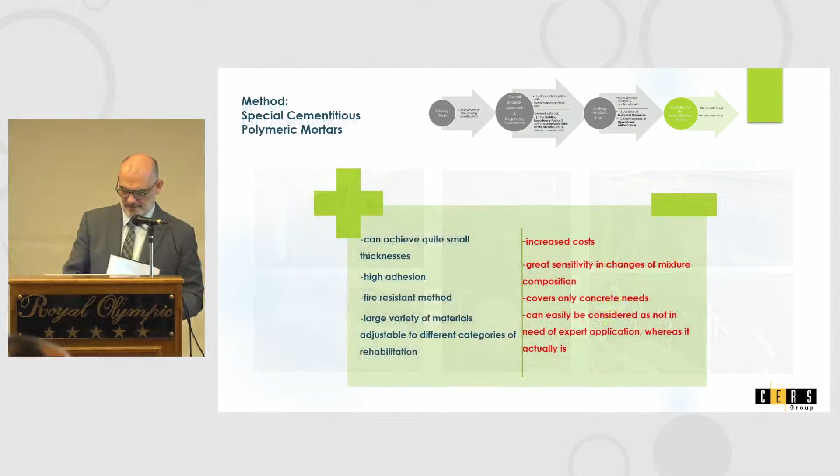Cementitious polymeric mortars have the advantage of achieving quite small thicknesses, high adhesion, and they are a fire-resistant method. However, they have increased costs and great sensitivity in the mixture process. The main problem is that sometimes they're considered as not needing expert application, where this is actually not the case.

Composite materials are also very common here in Greece. It is a clean, quick application. The dimensions of the strengthened elements remain almost unchanged, and FRP's mechanical properties remain unchanged in time as well. They can be painted and coated. Nowadays, they have a low cost and a short time of application.

However, they require additional measures: painting and coating in order to become fire resistant. They need careful and detailed preparation, and they are in need of expert application.

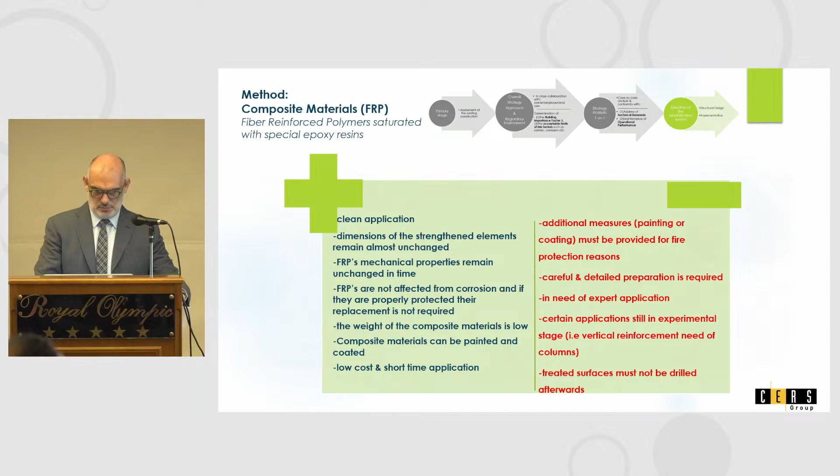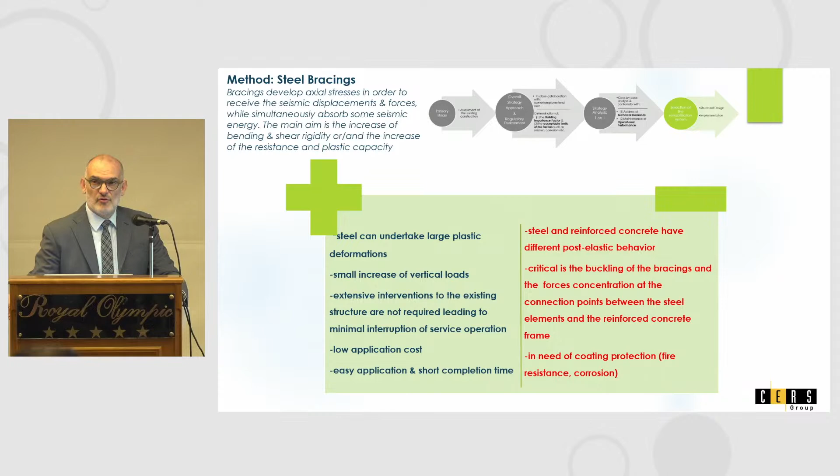As a disadvantage, steel and reinforced concrete have different post-elastic behavior, and of course they are in need of coating protection for purposes of fire resistance and corrosion.

A more modern method of structural intervention and rehabilitation is the external post-tensioning system. This leads to resetting the bending deflection of beams and slabs, sealing of cracks to avoid reinforcement corrosion, and does not increase the total mass of the construction. It is measurable and adjustable due to future needs and can be redesigned.

However, it has large axial forces imposed on columns due to the cable anchoring. There is extreme need for design and implementation expertise, and the cost is significant.

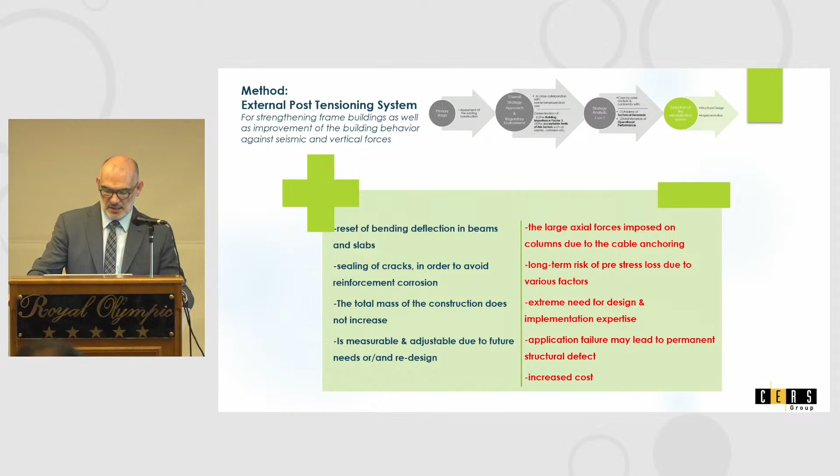Another very modern rehabilitation approach is seismic isolation in existing structures. This leads to the abolition of requirements for elements' plasticity. However, it has very high expertise design requirements, and it is of an increased cost.

In Greece, seismic isolation has so far only been applied in new buildings, and to my knowledge there are only 3 buildings in Athens where seismic isolation has been adopted as a solution. I do not know of any existing building in Greece where seismic isolation has been adopted as a rehabilitation methodology.

However, this is something very common in our neighbor countries. It has been implemented in Turkey, in hospitals, and it has been implemented in Italy as well.

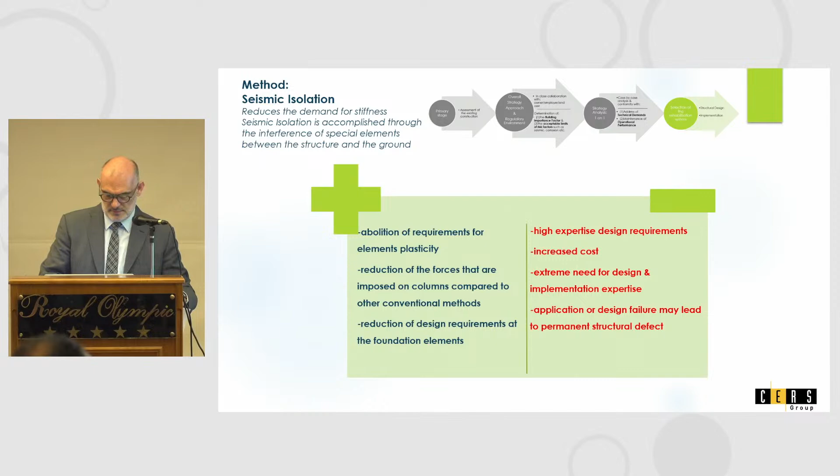Given the volume of existing old buildings in Greece and the delay exhibited so far in adopting all these new approaches in the Greek market, to my mind it is imperative to experiment and find new methodologies, such as the ones we've seen, in order to rapidly create a safe and functional building environment. Thank you very much.